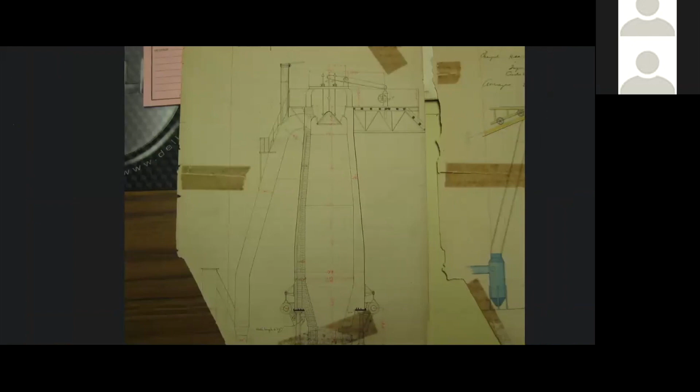So here's a drawing from the National Canal Museum archives that gives you a sense of what's going on inside these furnaces. Again, these were iron furnaces. This one here looks like an early one where it's just boilerplate riveted together. We'll see John Fritz's variation of that in a little while. But you can see the refractory brick lining it. Up at the very top, you have that bridge to the elevator tower where men would use wheelbarrows to charge the raw material in. You'll notice that the material doesn't go straight down the stack of the furnace, it hits this thing that looks like a bell.

And that's exactly what the blast furnace workers called it, bell. What it did was it sealed up the furnace. Because remember, all of that carbon monoxide gas it was creating, carbon monoxide is flammable when you have enough of it and the right mixture with air. So what these iron companies did was they took a pipe off of the furnace, piped this carbon monoxide gas down to the surface, and they actually used it in stoves.

We talked before about how anthracite required a preheated blast of air. Well, they would use the carbon monoxide gas to actually be ignited, form a flame, and heat up the air through pipes that were going through stoves to warm up the air going inside the furnace. So to help keep that gas in, they have this bell system. The bell would seal up the furnace and direct that gas down to those stoves where it could be burned. It could also be burned in boilers to raise steam to run steam engines.

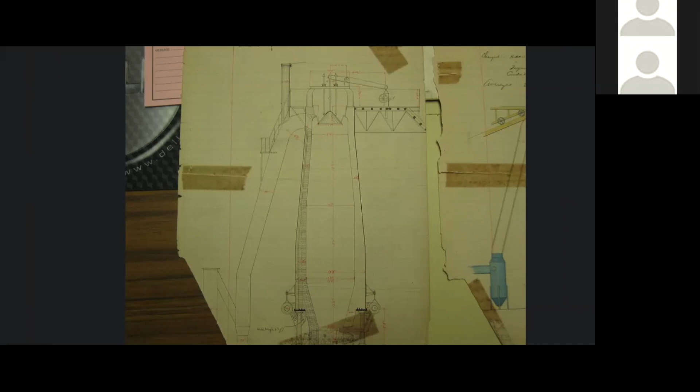And of course, you still have to feed raw material into the blast furnaces. So what they would do is on this bridge, they have a cylinder that goes up and down. As that cylinder goes up, it pivots this walking beam, and then that rod above the bell goes down and the bell actually descends. So you would fill up around the bell with your raw material, your anthracite coal, your limestone, your iron ore, and then you would quickly drop the bell. The material would fall down around it, lift the bell back up again. That would seal the furnace off, and you'd have a minimal amount of gas escaping into the atmosphere.

Another view of the plant, 1880s or 90s. This is a good image to show how the plant is actually laid out. So we'll see if we can zoom in here. If you look really closely in the center of the screen, you'll see a line, actually several lines. Those are railroad tracks from the Lehigh Valley Railroad. That's what's First Street today. That's the street that you walk in on if you're going to the Levitt Pavilion.

It's the street right in front of the blast furnaces, but that used to be a mainline railroad track there. And you'll look above that, slightly to the right in the image, you'll see the sign that says Engine House. We're going to be discussing that building on Wednesday. Above that is the stock house, that's where the raw materials for the furnaces came in. So the raw materials, before they got to that elevator shaft, had to be delivered somehow. They actually had a giant stone building. A fraction of it is still intact today as the Bethlehem Visitor Center. It used to extend hundreds of feet to the east.

And it had a twin-track railroad trestle 12 feet high inside of it. They would come in with railroad cars, unload them, and then men would manually load the wheelbarrows up, put them into these elevators right on top of the furnace, and charge the furnaces.

The furnaces are hard to see, but they make these little fingers that come off of the building known as the stock house here. And attached to the furnaces are these sheds known as cast houses. We'll see images of those a little bit later on. And then railroad tracks connect the cast houses down to other operations of the plant.

What's interesting is how they dealt with the Lehigh Valley Railroad. Having trains cross over at grade, especially in an industrial operation on the mainline railroad, isn't the best scenario. So they actually dug a tunnel and used it below the Lehigh Valley Railroad to get their iron from the blast furnaces to the steel mill, which in those days was the Bessemer steel mill, as the iron foundry building.

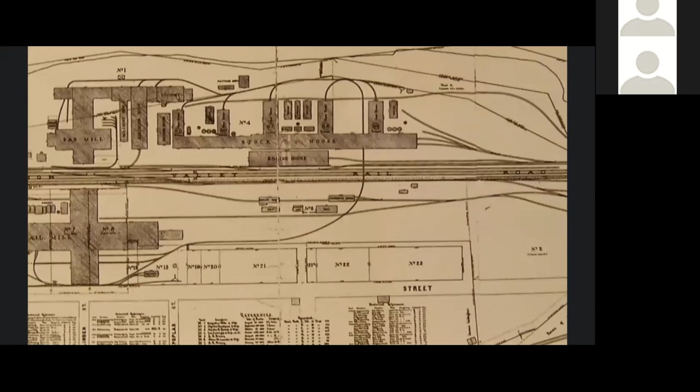Sorry for the slow moving pace here.

So this image here shows those 1870s furnaces. You can see one furnace on the left, a smokestack in the middle, and then this would have been a mirror image repeated on the right-hand side with the other furnace, which would have been number 5. So when you look at this image, you're seeing several things. The building with a triangular roof facing us is a cast house.

You see that big pipe coming down. That's the downcomer that takes the carbon monoxide gas out of the furnace and directs it towards boilers and stoves. These stoves don't look like traditional stoves like you see in your house. What they have inside them are a number of tubes about 20 feet tall, 8 inches in diameter on the inside, made of cast iron. And the blowing engines, which we'll discuss on Wednesday, pump air through these stoves. It gets heated up by the flame, and the preheated air then enters into the furnace.

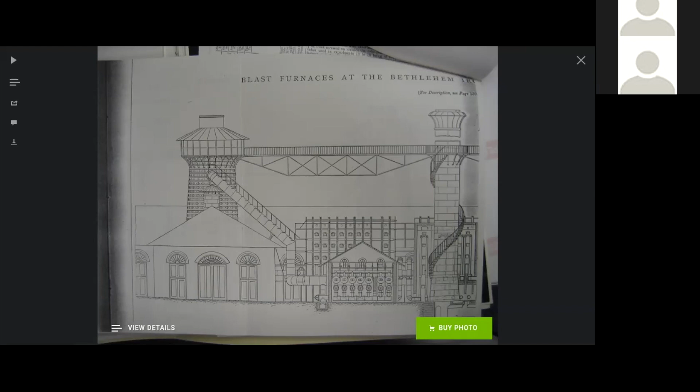And we'll see that a little bit further on, how it actually makes its entrance underneath all of this heavy burden of iron ore, coal, and limestone. But as we look at this furnace, it has a very different construction from the rest of the earlier furnaces, and even from the modern furnaces today. This is what's known as crinoline construction.

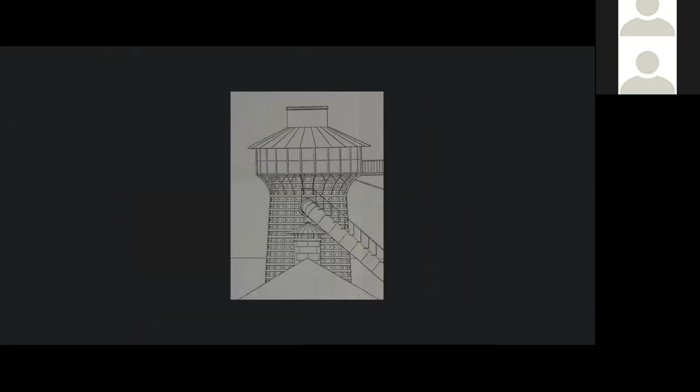Those of you who studied 19th century women's fashion would know where it comes from, not that I have, but it comes from the steel framework that was used to make these big skirts that some women used to wear back then. So when it came time to design the furnaces, they took their name from that. So it has these wrought iron hoops that encircle it, then these vertical bars that go skyward, and they're all riveted together. There's openings like maybe 16 inches by 24 inches or so in between these iron bands and vertical pieces, and there's little holes inside there.

You can actually use those holes to check out the furnace and how it's doing. If it got a hot spot, you might see that furnace behave a little bit differently. And then you could actually go into that crinoline construction, those hoops, secure yourself to it, and then do repairs to the furnace if you had to.

This was a very interesting design pioneered by John Fritz in the 1870s here at Bethlehem. These furnaces are long gone today. They're about 70 feet tall on the inside, and they ran into the early 20th century.

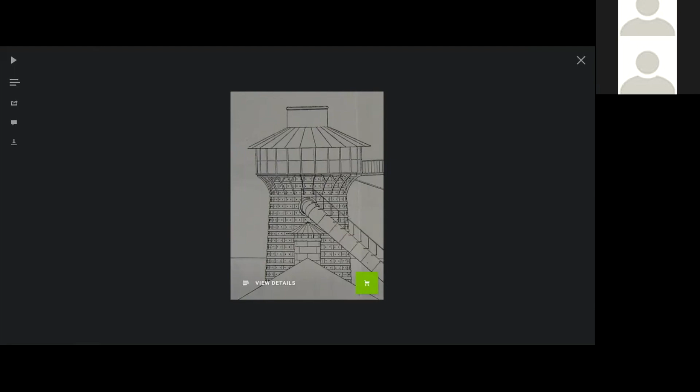Just trying to change my image here. It'll move eventually. Really sorry about this, I think the computer's kind of freezing right now. Let me see if I can try something else to get to the image I want. This might work. Okay, so...

Once the iron came out of those furnaces, there were different ways of handling it. In the very early years, they would pour it out into a bed of sand, and this is a practice that survived well into the 20th century in some what they call merchant iron furnaces, like Sloss furnaces in Alabama. But anyways, this bed of sand had troughs cut into it, and these troughs had runners going off of it.

And these little runners, they look like fingers on a comb coming off. And when this was filled with hot metal glowing orange, it looked like piglets suckling a sow, so they called it pig iron. And that's how the local baseball team got their name.

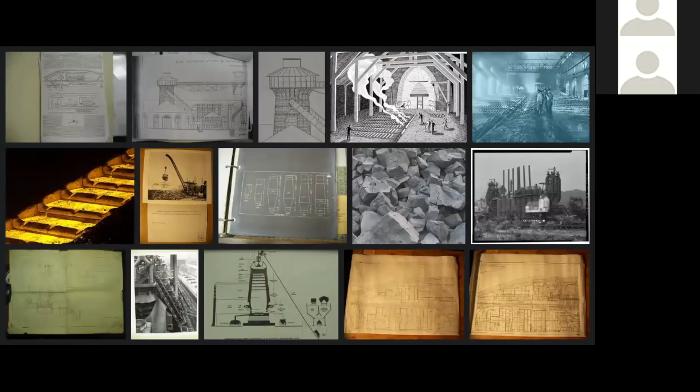Okay, I'm just going to have to keep going back to my reference images. Here's an actual photograph showing one of those more modern furnaces. I believe this one was out in Chicago, where the sand bed extended out. You can see the bed is actually sloping.

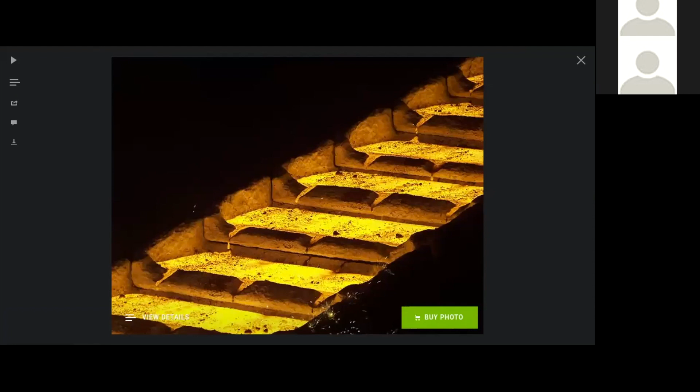That way you take advantage of gravity to let the iron flow. Bethlehem Steel did this for a while, but by the 20th century they were starting to invest in what was known as a pig casting machine. They'd take molten iron, pour it into railroad cars or ladles, and then take that iron to these machines with molds that had liquid iron poured into them.

It'd be like a conveyor belt type of system. Some were circular, some were linear, but the iron would fill these molds, solidify, and then dump out into a pile, and then they would take it to foundries or whatever other end users were going to be handling the iron after that.

So this is just another image showing how that iron got stacked up, reclaimed, and moved around. This was taken at the Lackawanna plant with a steam-powered crane with an electromagnet, lifting up those pieces of pig iron.

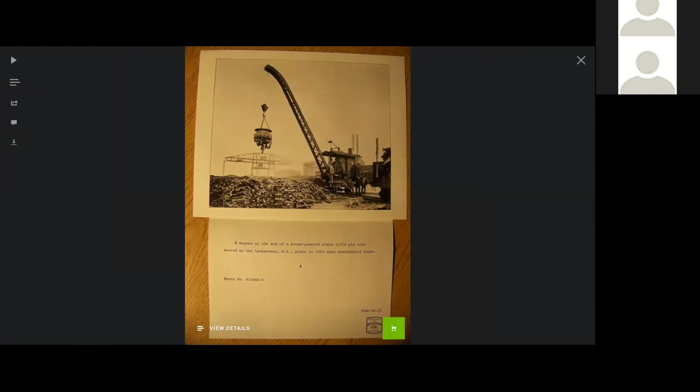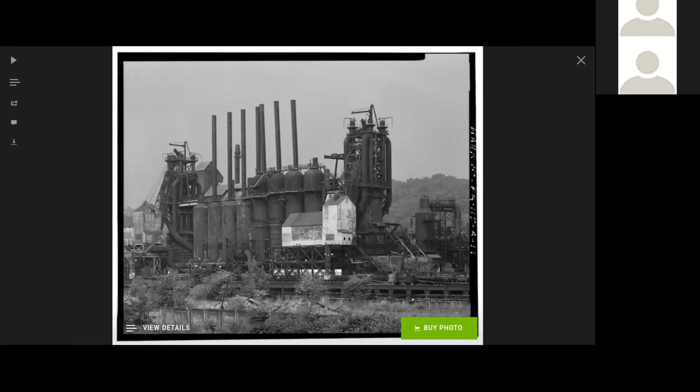So Bethlehem Iron Company operated with those elevators and wheelbarrows into the early 20th century, but the competition was actually beginning to outpace them. In the 1890s, Andrew Carnegie helped spur what was called the Duquesne Revolution in blast furnaces. His company had a blast furnace and steel mill plant at Duquesne, Pennsylvania, along the Monongahela River, and they were looking for ways to save money, as usual.

So what they started doing was inventing a way to get raw materials to the top of the furnace without using elevators and wheelbarrows. Instead, you can see these structures, one in the middle of the picture painted white, and one to the left, kind of elevated with peaked roofs. Those are actually hoist houses that house hoisting machines that draw in wire ropes that pull up skip cars on an inclined railroad to the very top of the furnace.

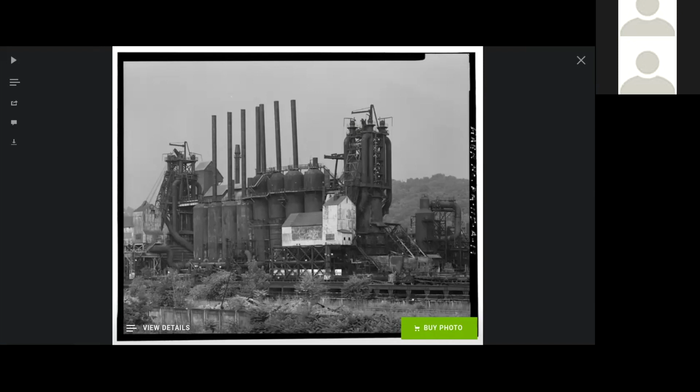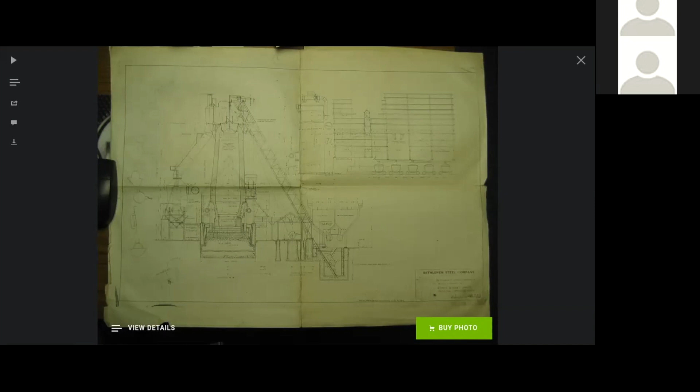We'll go into more details about how those work, but this essentially automated the system and reduced costs by a great deal. Other things associated with it: to fill up those skip cars, you had a trestle, which we see today in Bethlehem as the Hoover Mason trestle, a more enhanced dust collection system, larger furnaces, and you can see in the picture, if I zoom in, 1, 2, 3, 4, 5 ladle cars that the liquid iron would be poured into, and then those liquid iron-filled railroad cars would transport the iron to the steelmaking furnaces.

This drawing shows the system a little better, and we'll go through this in more detail with actual photographs. You come in on this railroad trestle, and you have ore and limestone, at least in the case of Bethlehem Steel here in Bethlehem, PA, on the south side, closest to ArtsQuest. Then on the north side, closest to the furnaces, you have another set of bins devoted to coke. Coke is something they started using in the 1870s and found strong use in the early 20th century, basically running strictly on coke at that point.

Coke is bituminous coal that's been baked to remove the impurities, so you're left with a very high concentration of carbon, very little of other elements inside the product. Coke is also more porous than anthracite coal—if you looked at those anthracite coal pictures, it was kind of shiny and dense, but coke almost looks like lava rock. It has a lot of holes in it, so when you're blowing air into the furnace, it can burn better and release the carbon into the rest of the furnace for the chemical reaction to occur. It's also very strong—anthracite coal tended to shear away and break, but coke would actually hold up this very, very heavy load above it.

So you can see the alternating layers of coke, ore, and limestone in the furnaces, and there's also temperature markings here—it might be 400 degrees near the top of the furnace, but you're looking at 3,000 degrees by the time that hot air, which itself could be well over 1,000 degrees, comes into the furnace, and molten slag pours out. Slag is less dense than iron, so it floats on top, and it's poured out through what they call the monkey notch. Then iron at the very lowest point goes into the hot metal cars. Again, we'll see more of this in detail as we move through the tour.

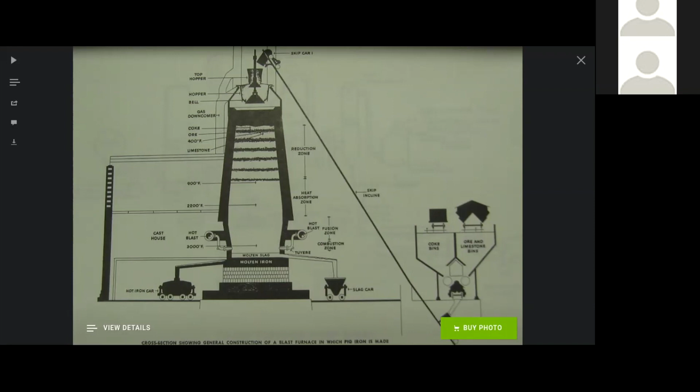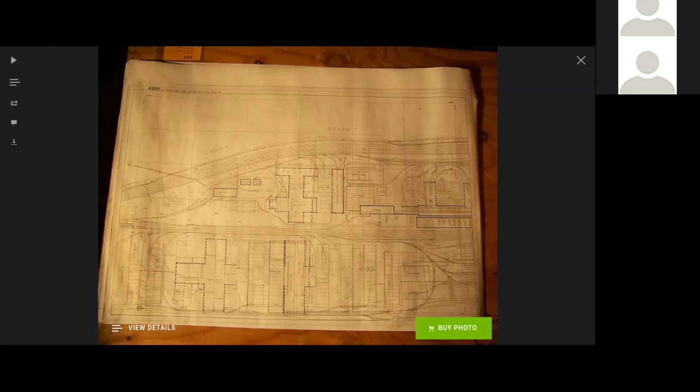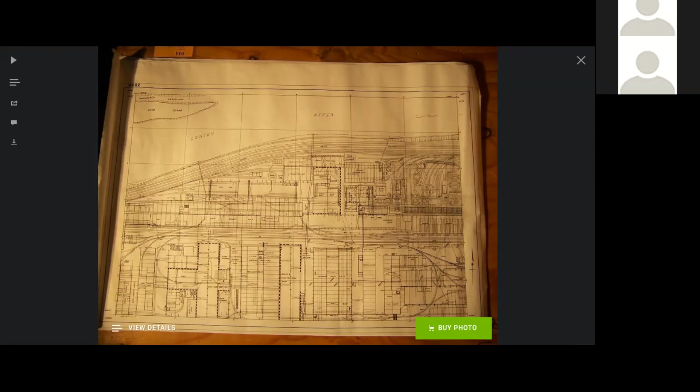When you look at the next image, that stove is still there, and 4 more have been added, and a furnace has been built on the site of the old #2 furnace. The old furnaces, by and large, kept their locations and gave them over to the new modern furnaces that you see here today. So A furnace was built in 1915, remodeled in 1950. There are actually 3 generations of furnaces on the site. You'll see B rising to the left of it.

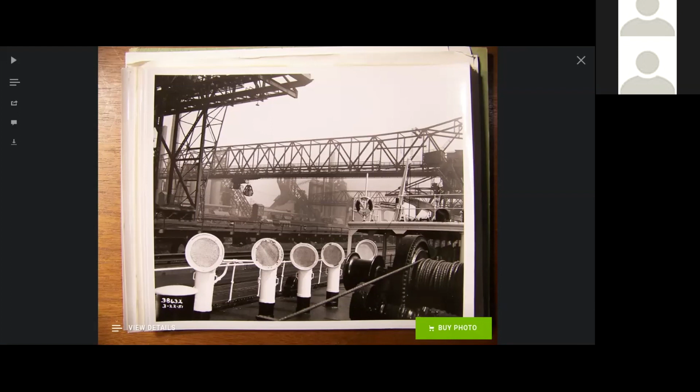So here's another view. Again, this is a competition to help frame what's going on here in Bethlehem. It makes a little bit more sense where you can see how it evolved in other locations. So again, you have the ship channel, ore yard, and your blast furnaces. Bing, bam, boom. It's a nice, easy, very economical process.

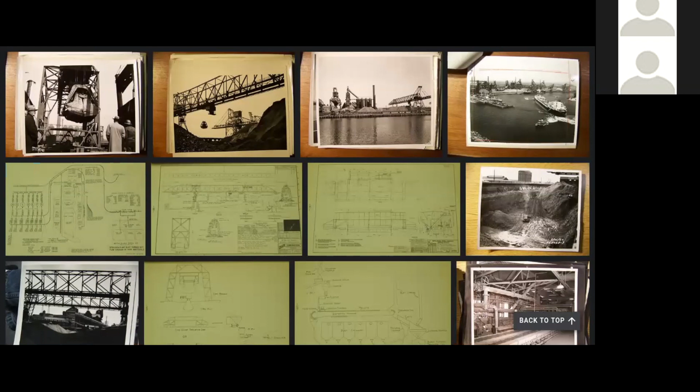But because Bethlehem is really a Civil War era plant that just kept expanding and expanding, they had to figure out how do you make this system work and make it pay compared to these other plants that have those inherent natural advantages. So Bethlehem Steel developed the ore yard.

It was located on what they called the ore farm, which was originally a limestone quarry. This is where the casino is located at today, because this was the only really good source of open ground close to the blast furnaces. If you wanted to build any closer, you'd have to tear down the machine shop or buy up homes and businesses. So this was the next best place that was available.

So they established the ore yard here. They have a broad gauge railway running. It went to a sintering plant, which we'll explain momentarily. And then finally, about half a mile or so down the road to the blast furnaces. And that's the Hoover Mason trestle that we all know today.

So it took this Midwestern technology and Western Pennsylvania technology and brought it back to Bethlehem and made it fit into this old plant to really give it new life. If it wasn't for a technology like this, this plant might have died in the early 1900s, like most of the other facilities in this area did.

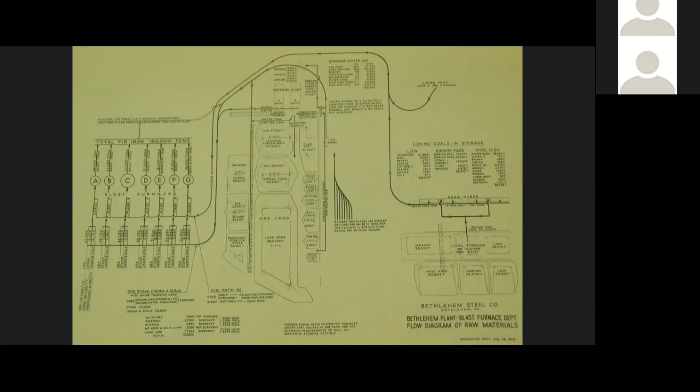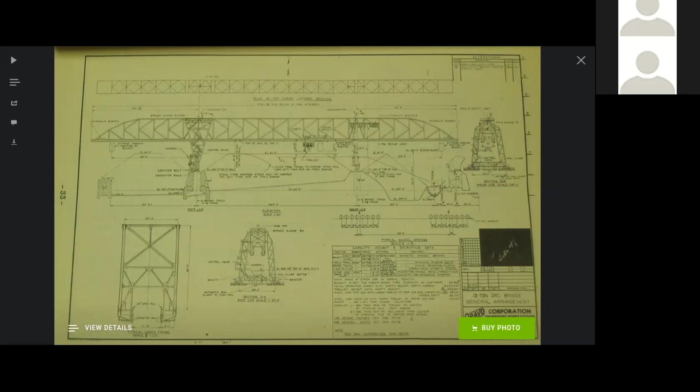So there's actually a great book, a blast furnace manual published in the 1950s, that I got these images from. This shows the ore bridge, over 500 feet long. It had a bucket on it that would deposit or pick up iron ore as needed, load it into a transfer car. This is a drawing of one that's a little faded, but you can see there's railroad wheels on the bottom and this inclined hopper that allowed iron ore to be dumped out of it in one direction.

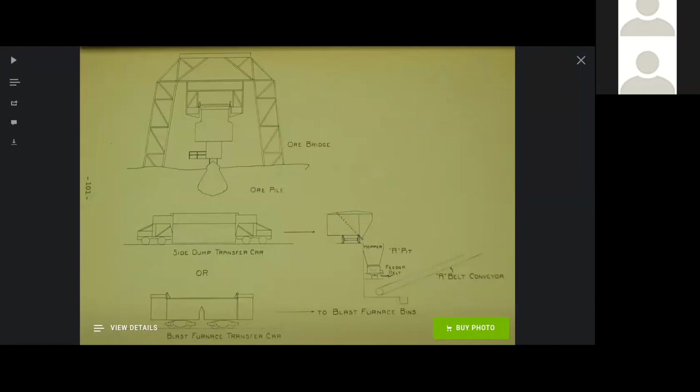The sintering plant is important to talk about here because remember we talked about how all of that carbon monoxide came off of the furnaces and those pipes. Those pipes also delivered a lot of dust from the furnaces. So that dust was actually collected and recycled through a machine in the sintering plant, where it's combined with coke dust and intense heat and a downdraft.

And basically, for our purposes, you can describe it as being baked into a peanut brittle-like substance that could be broken apart and fit as chunks into the blast furnaces. Blast furnaces really don't like dust, but if material comes in lumps or chunks or pellets, they're okay with that. So this machine reformulated that dust into a usable material.

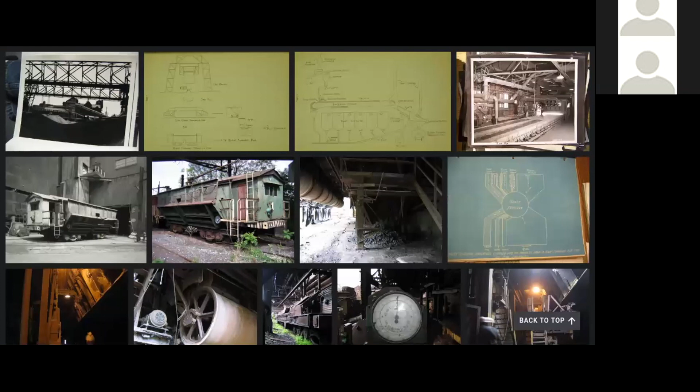The broad gauge transfer cars you can still see on the Hoover Mason trestle today. 7-foot 10.5-inch gauge hauled the raw material to the blast furnaces, except for the coke, which came in by standard gauge train from the coke works a few miles away.

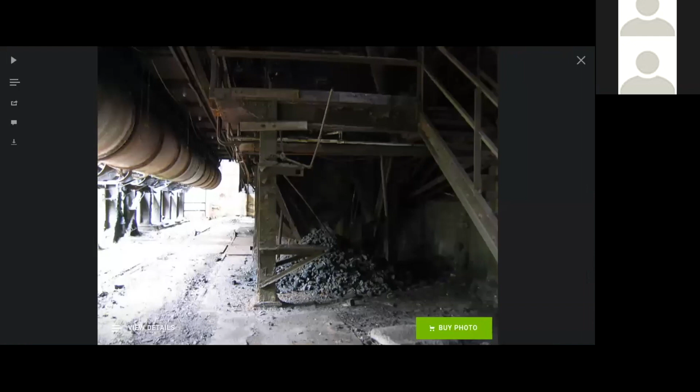And then they dumped into bins. Now this is something you really can't see today. This is under the trestle. This was taken about 10 or so years ago. You can see overhead bins and then these rotating drums. These drums were connected to a line shaft, electrically motor driven, and they spun around as needed to help the material descend out of the bins and into scale cars.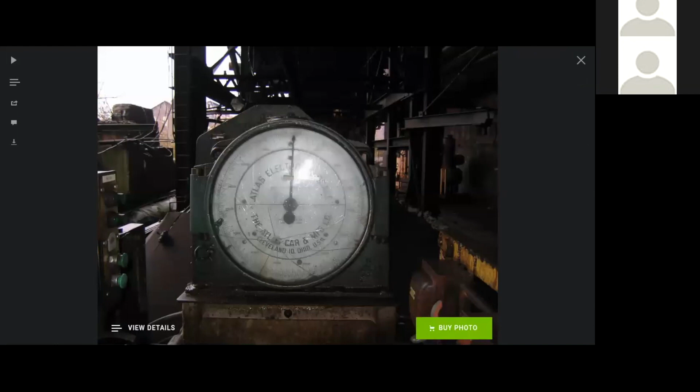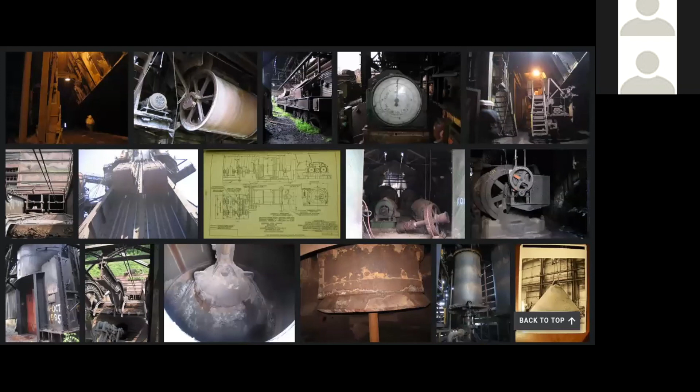So you would fill the bins up on these cars with raw materials from the trestle overhead. You would weigh it out on the scale. When you got to the right point, you would close the bin, and then you would move this car, which is electrically powered, kind of like a subway car, to the skip pit. And the skips, these pictures were taken at Carrie Furnaces in Pittsburgh, would lower down into this pit, be filled with raw material, and then go up to the top of the furnace.

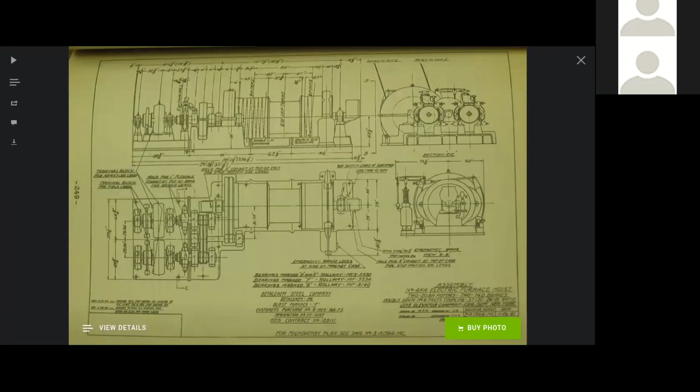The skips were controlled by an electrically operated hoisting machine. It's a double drum hoist with a drum divided on the left side and the right side, and as one wire rope played out, the other would wind in. This also helped keep the cars balanced.

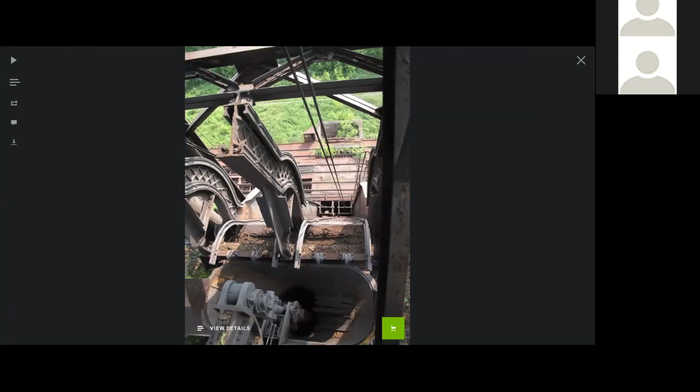So one car was at the top, one at the bottom, and they'd meet in the middle. This is a view looking from the top down, and it gives a good sense of how the system worked. The cables pulled the cars up to the top, and one set of wheels would ride on these funny shaped rails, allowing the car to automatically dump and fall into the hopper below. Those arms and pins are what actually move the bell up and down.

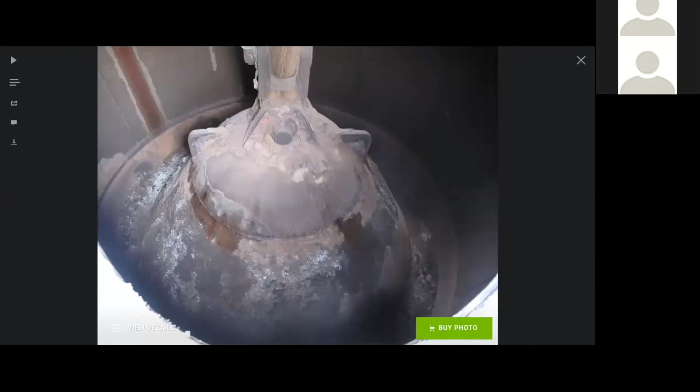So it's just like that early furnace we saw in the drawing with the bell, but in modern, or at least 20th century, furnaces there are two bells. This was from Carrie Furnaces in Pittsburgh. Looking down you can see a bell, and how it sits in the silo-shaped area so the raw material falls around it. You can still see debris built up around it. Then it would drop down, and the material would fall into the actual furnace and begin the process of smelting.

This is what it looks like in between, looking at the smaller bell. There's a small bell and a large bell, and they form an airlock, so only a very small amount of gas actually escapes. This would go up and down, and the material would fall down through the joint that opens up between that cylinder and the bell-shaped piece. In Bethlehem, the bells were operated by pneumatic cylinders off of the blast gas, which was powered by the blowing engine. There's just a big piston inside that goes up and down and operates the bell.

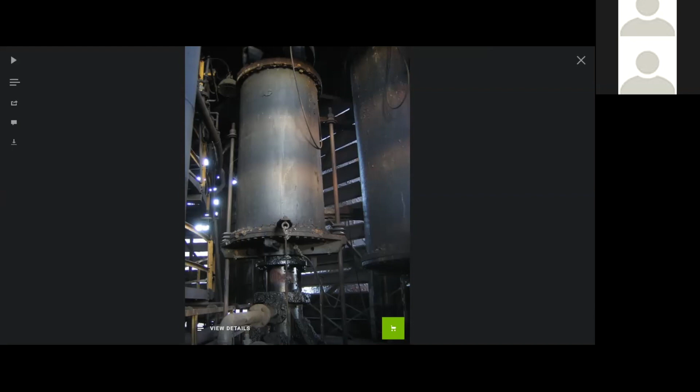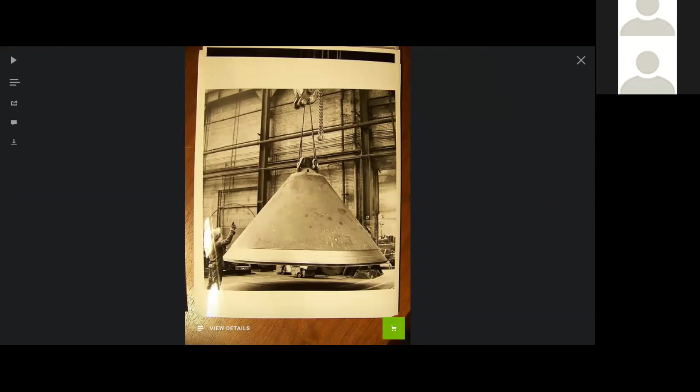You can see a picture of one under construction here. They actually cast them out of steel at the Bethlehem plant. They used steel because you could weld to them and build them up as they got worn out, then machine them down to like new again.

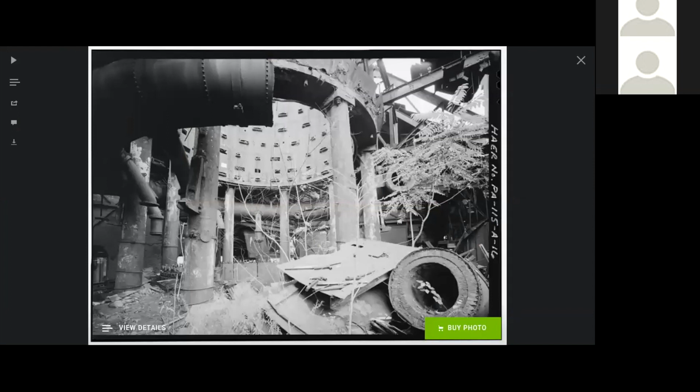This is a view inside one of those more modern furnaces. You can see it has these legs that hold up the actual stack, and then there are little fingers that come out in here. The temperatures are so intense that the furnaces themselves have to be water cooled.

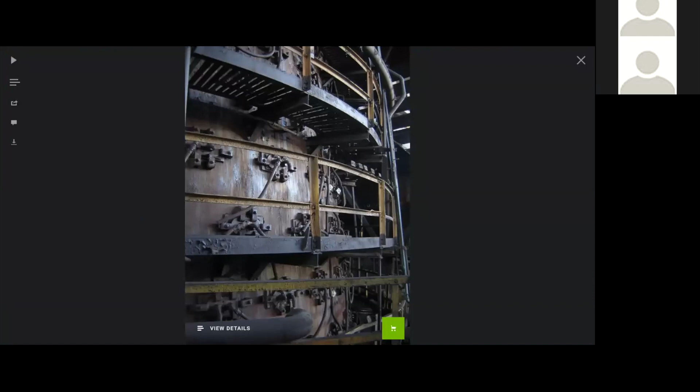Now, the job required to actually keep these furnaces hot falls to the stoves and the stove tenders. In the early days, there were cast iron pipes heated by flame. What they discovered was a much more efficient and economical method was to use regenerative stoves. These were steel-shelled on the outside, but full of refractory bricks on the inside.

Then you reverse that airflow with cold air coming in from the blowing engines, after you've turned off the gas and the bricks are preheated. They regenerate the heat they've stored - basically you take these hot bricks and blow the cold air over them. As the cold air passes over the bricks, it emerges from the bottom of the stove nice and hot, ready to go into the blast furnace at around 1,000 to 1,500 degrees. They also had a mixing valve past the stove so you could mix in cold air to get the temperature to just the right point.

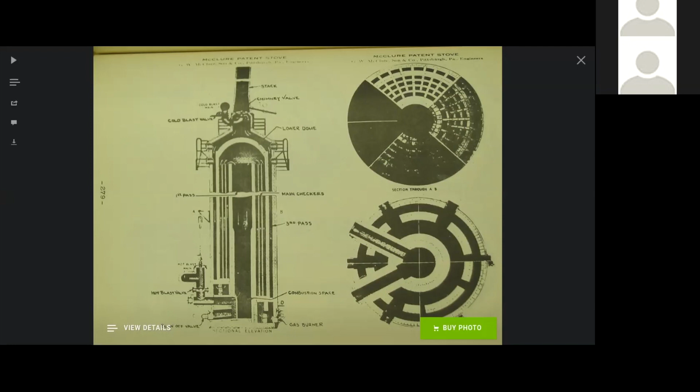Now, one thing to note is that you only need one stove at a time to actually provide hot air. But because you can only have one stove pumping hot air and the other one being warmed up, you'd actually rotate between the stoves. So you'd usually have a minimum of 3 stoves.

One would be warming up with gas being burned inside of it. The other one would have the cold air going through and being heated by the pre-warmed bricks. And then the other one would be in reserve in case you had some sort of issue. Some furnaces had up to 5 stoves.

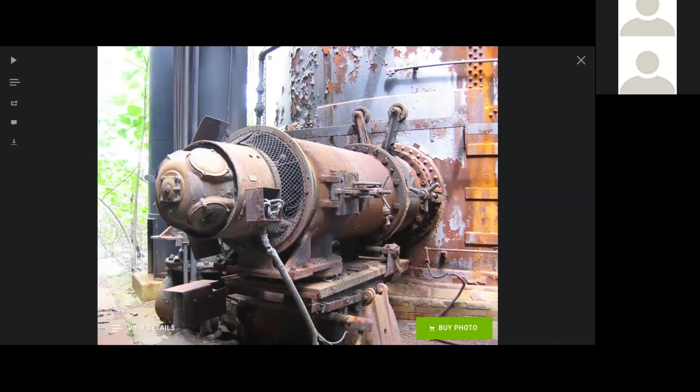This is an example of one of the burners. You can see an electric motor, air intake, fuel would come up from the bottom, ignite, and really put a tremendous amount of heat into that refractory brick.

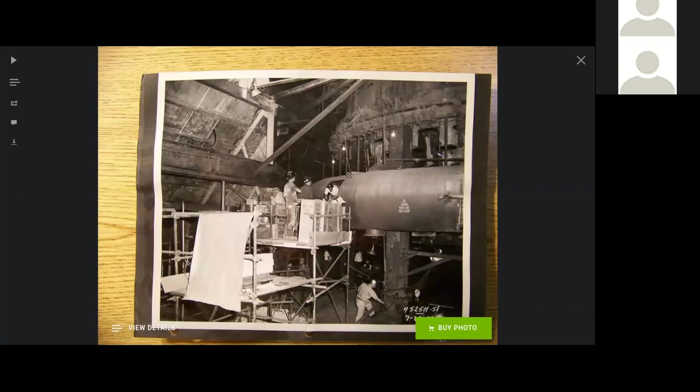Now, the actual furnace itself got its air from, again, this term comes from women's clothing, the bustle pipe. This encircled the furnace. These guys are inside trying to put a refractory brick lining because, again, everything here is tremendously hot. And then from this bustle pipe, which encircles the furnace, these goosenecks hang down.

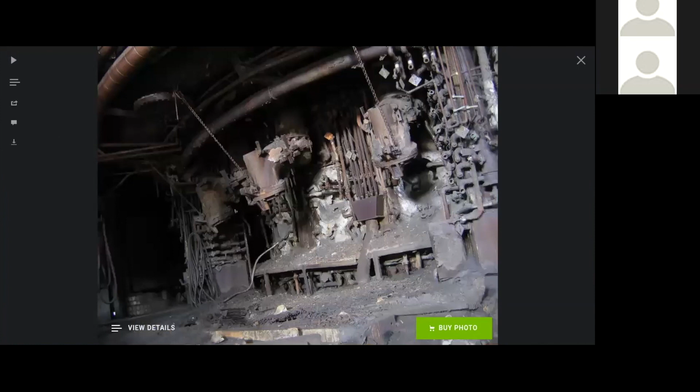They are connected to these copper-cooled tuyeres, copper-made water-cooled tuyeres, which are basically pipes that allow the air to flow from the bustle pipe above through these goosenecks and through these tuyere pipes into the furnace itself, and that's how the hot air gets in there.

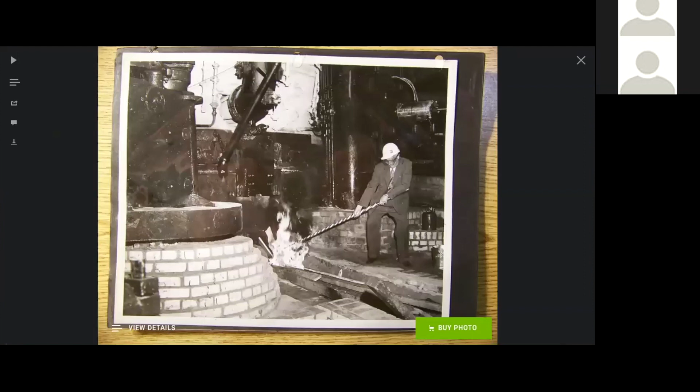In Bethlehem, those came in at about 30 psi, that's 30 pounds per square inch. And it's actually enough to help get the material to basically float, and the air to percolate up into it and help feed that chemical reaction that melts the iron.

This is a shot of a blast furnace being lit up for the first time. You can see everything's painted, shiny, brand new, and it really didn't look that way for long.

So once you had iron flowing, again, this is a long process because it's not turn it on and it instantly starts. It takes a while to actually get all the heat absorbed and then the iron to actually start melting. And you don't fill the furnace with iron immediately. You fill it with combustibles and then coke, and eventually you start trickling the iron in and you get it melting out.

The hot metal, you can see an example of it right here. Again, we have many more photographs in our archives. And since we don't have access to them on site yet, these are just snapshots we took for research purposes early on, so we'll have much higher quality versions available in the future.

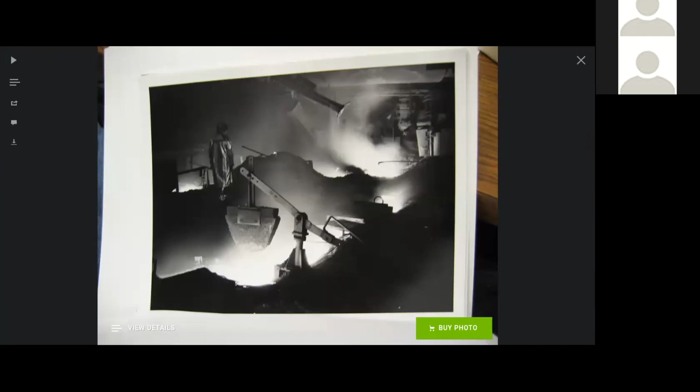But anyways, you can see the worker in the silver suit helping open and close these gates to direct the iron and slag to where it needs to go.

And after the iron had been tapped out, this thing here called a mud gun would actually be filled with clay. It would go in and seal up the hole in the furnace, and that would keep the iron from leaking out. So it had to build up for a period of maybe 2.5 hours before it was ready to tap out again.

And then to get it out, another piece called a tap hole drill. You can see the back side of it here, and you can just barely see a drill rod coming out. It would actually hammer out and drill out that clay plug that the mud gun put in there. And when this drill got to the end of that plug, molten iron would then come spewing forth out of the furnace.

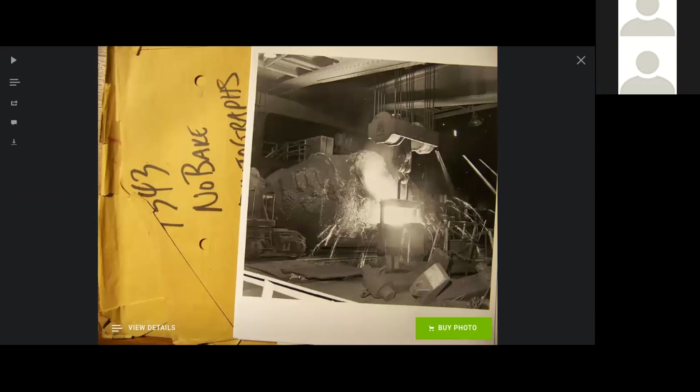Here's a shot of a submarine car that will be filled with molten iron. This is a shot of it being emptied out into a foundry ladle. But these things in the Bethlehem plant held 250 tons of iron at a shot.

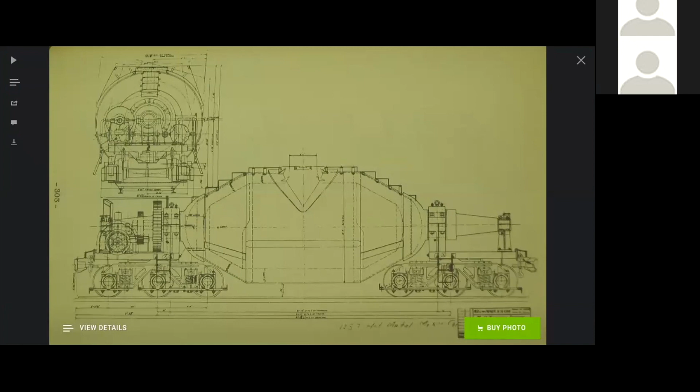And there were multiple cars in a train. Drawings so you can see the refractory lining. Again, this wasn't just steel. There was well over a foot, and we'd have to scale it or look from our specifications about how exactly thick this lining was. It was sufficient to hold molten iron there for up to 3 days if absolutely necessary. This was a fairly reliable technology, but as usual, things could go wrong.

So sometimes the train derailed. This is the case where they called a big hook in and had to lift it back onto the rails. And sometimes they'd have to empty out the iron in places where it really wasn't intended to go if there was an emergency. So this is a situation where they actually poured the iron out, let it solidify, and came back in to hoist it out in some very large pieces.

Other times it would trickle out onto the floor, which was very unpleasant to say the least. If this iron got into a place where there was moisture, the water underneath it would boil into steam or even dissociate into hydrogen and oxygen and cause a massive explosion. A lot of people got injured and killed that way. That's why if you look at blast furnaces and the areas around them, you often see, in steelmaking furnaces too, brick floors, because they were much easier to repair than concrete, which could spall and damage, but bricks you could replace after you chip the iron away.

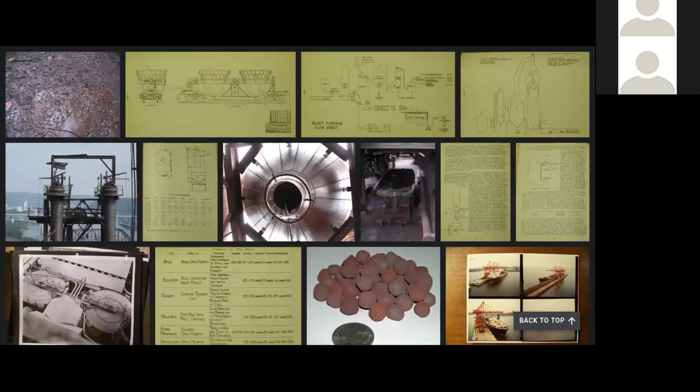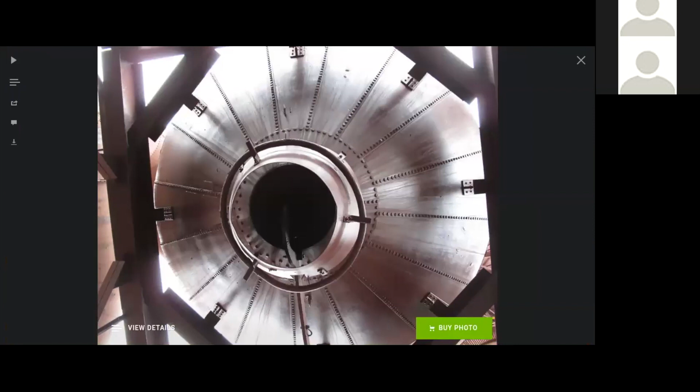Now this is a good time to think about that dust catching system again. We can go into a little bit more detail now that we know how the metal was handled. So you have these uptakes coming from the top of the furnace. The downcomer just goes down into a dust collector. This image here shows the bottom of a collector looking up. It's a very simple device. Basically a chamber where the gases and the dust come in about 2/3 of the way to the top, the dust settles down at the bottom, and then the gas gets redirected upward.

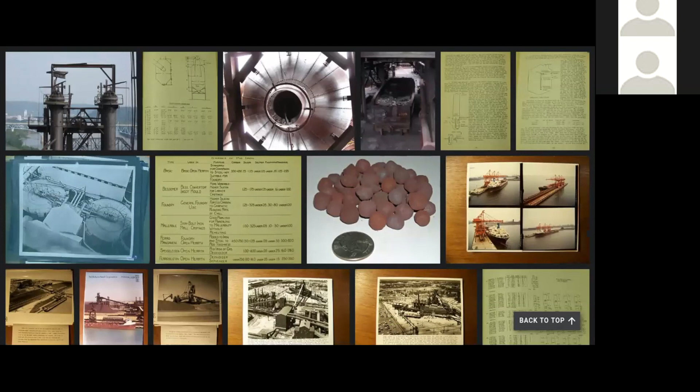Despite all the dust settling out, there's still a lot left in it, so it has to go through a secondary washing process. They have electrostatic precipitators and washers that feed water through the dust, and then eventually the water that's accumulated in this dust gets pumped into what they call a Dorr thickener, DORR. It has a revolving rake inside of it, and these are the 2 concrete pads that are left between, I believe, C and D furnaces today. These used to be steel walls that went up. They were impoundments for water. These rakes revolved around the inside and helped clarify the water.

This is just a chart showing the different types of iron. So these were very chemically fascinating processes. It wasn't just throw the iron ore, anthracite or coke in, and limestone and come out with molten iron. There's all sorts of different grades of iron. Like you would send one to the open hearth, you would send a different type to the Bessemer converters, yet another category for the foundries. I mean, you really had to have some very good metallurgists on board to make sure you were on top of your quality control.